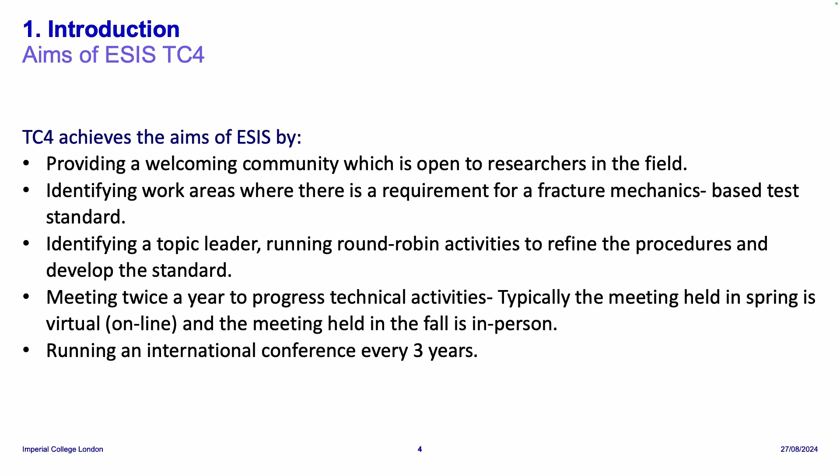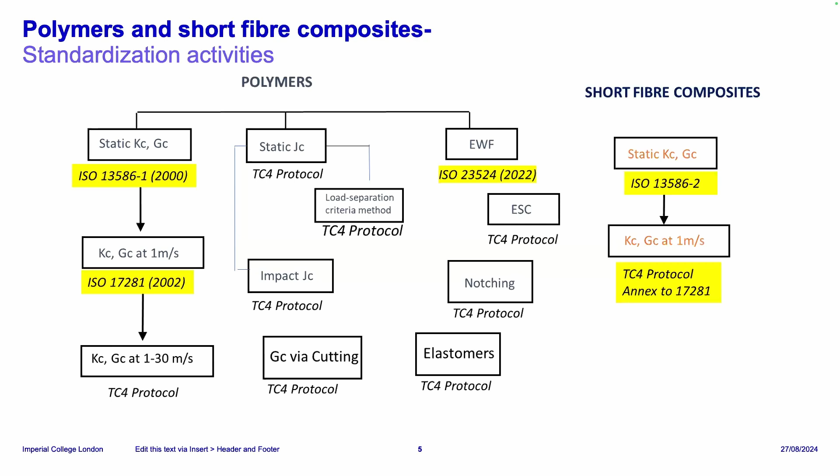Moving down, notching. So notching was something that was not terribly well defined in the early standards, and that ambiguity has sort of left certain problems within the system, which we feel needed to be resolved. So we've had an activity on notching, and quite a lot of progress has been made on that recently. Coming down to elastomers, so I'll say a little bit more about that in a moment. But certainly the extension of the left-hand side here to short fiber composites was something that was also achieved and was part of the early work.

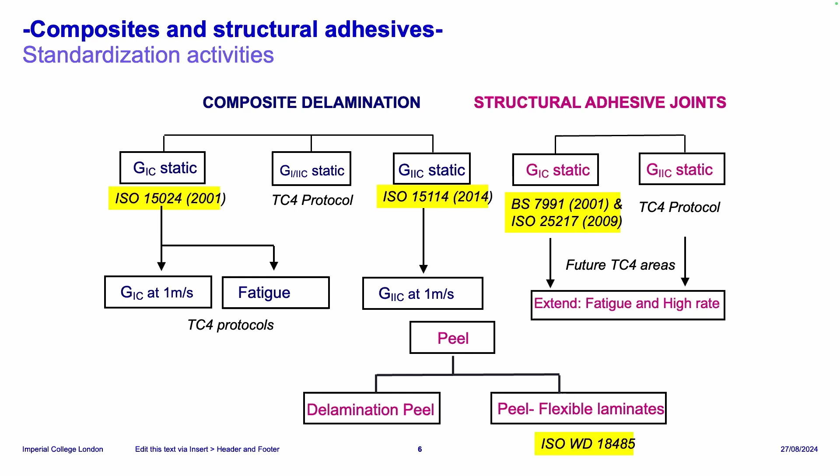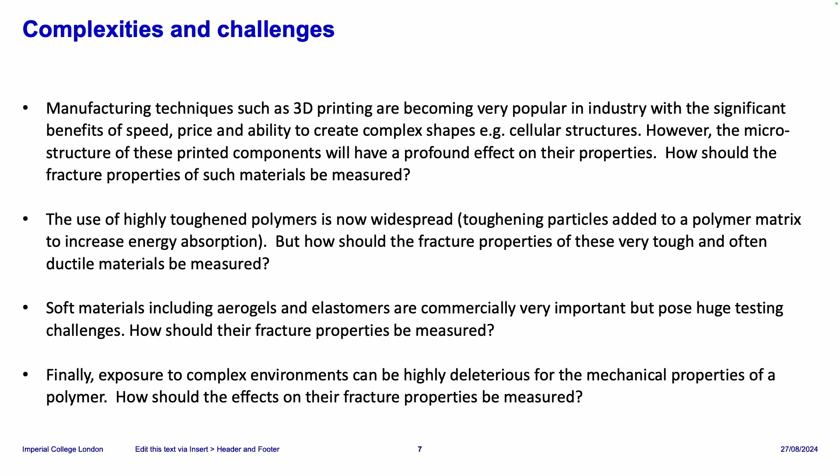And then what about very soft materials? So Alicia was talking earlier about aerogels. Now these pose us with many, many problems. So this is clearly a complex and challenging area for the committee. How should their fracture properties be measured? And for example, what about exposure to complex environments? Again, for polymers, this is a big question. So let's just have a quick look at 3 examples.

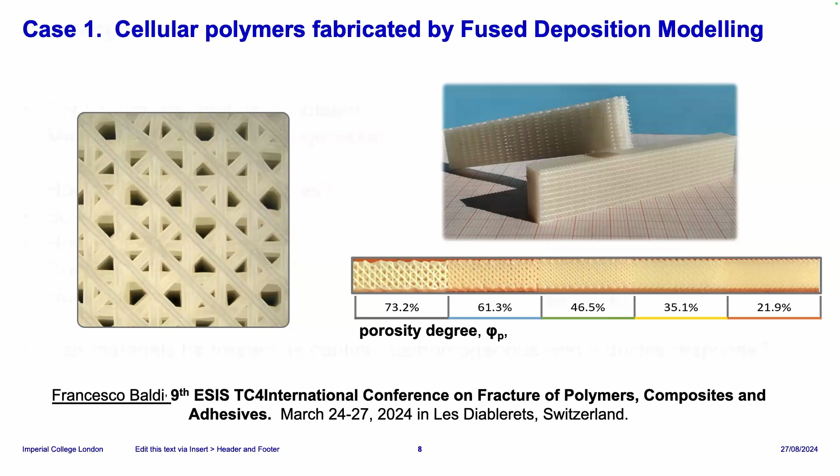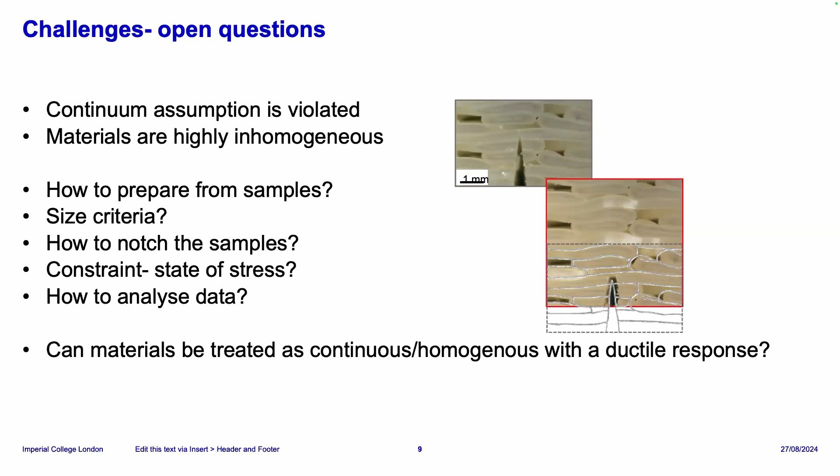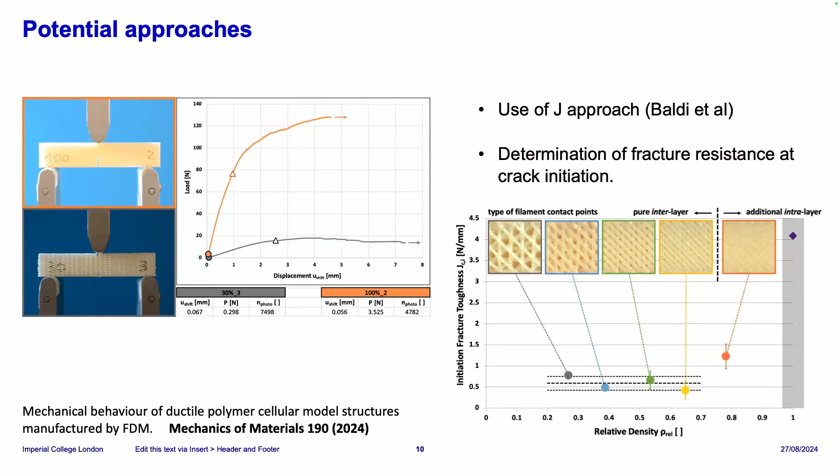So these are some slides from a recent paper by Francesco, where he's been looking at doing that, really applying known J techniques to these sort of materials and looking at the resistance to fracture initiation using the J technique for these sort of materials as a function of the relative density of the material. But clearly many challenges are faced here and lots of work to be done.

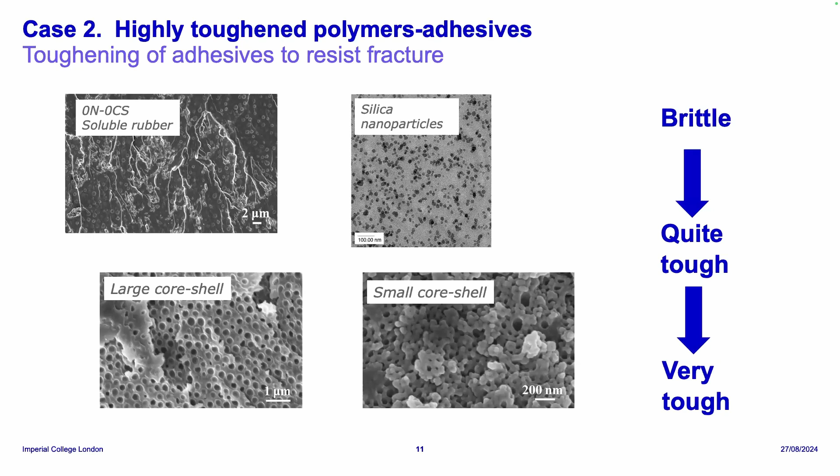Moving to the second example, and apologies for those of you who were here before the break, you would have seen this slide, but one of the areas that I've been leading is structural adhesives, and one of the challenges we're facing there is the materials becoming very tough and very ductile and being increasingly difficult to analyze and test within the constraints of LEFM. Obviously, we're using different methods to increase that toughness through, for example, soluble rubber or nanoparticles or different toughening particles with different properties like core shell rubbers.

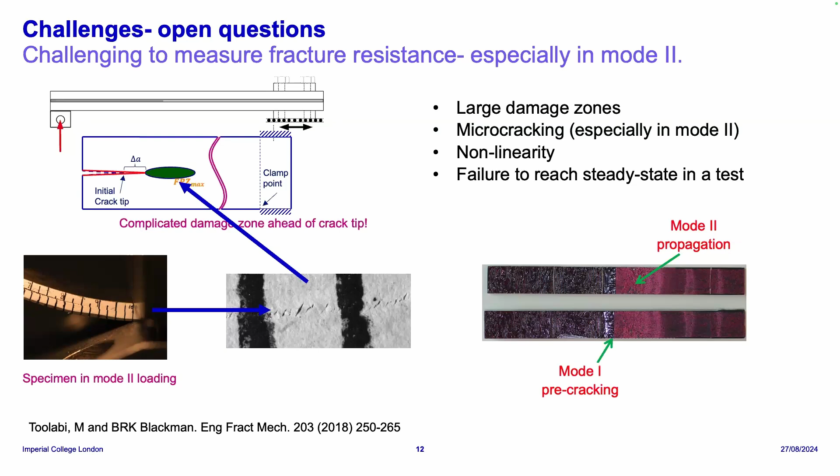And traditionally, this has led, in particular when we use mode 2 loading, to very large damage zones. So large fracture process zones being present with situations like micro cracking occurring. So we have particular issues also with nonlinearity and potentially the failure to reach a steady state in that sort of experiment.

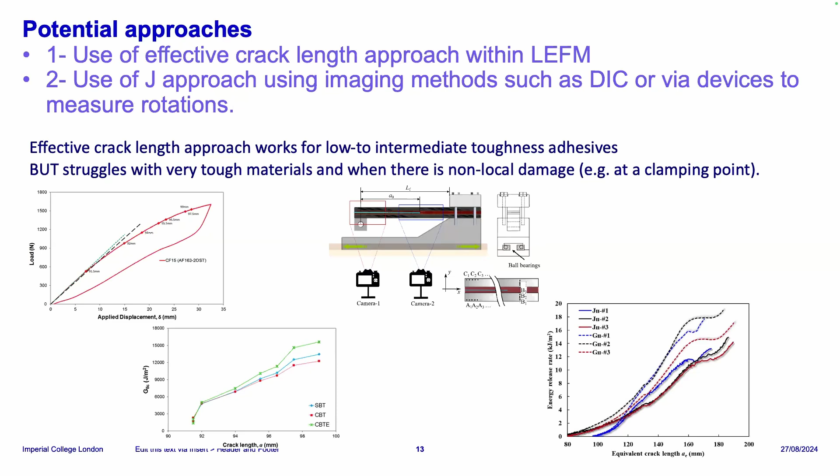What are the sort of potential approaches here? Well, of course, we've done quite a lot of work using effective crack lengths within the LEFM regime, and also the J approach combined with imaging methods such as DIC, and potentially the use of devices such as inclinometers to measure rotations. We've been making some progress in that, but of course there's an ongoing activity looking at this.

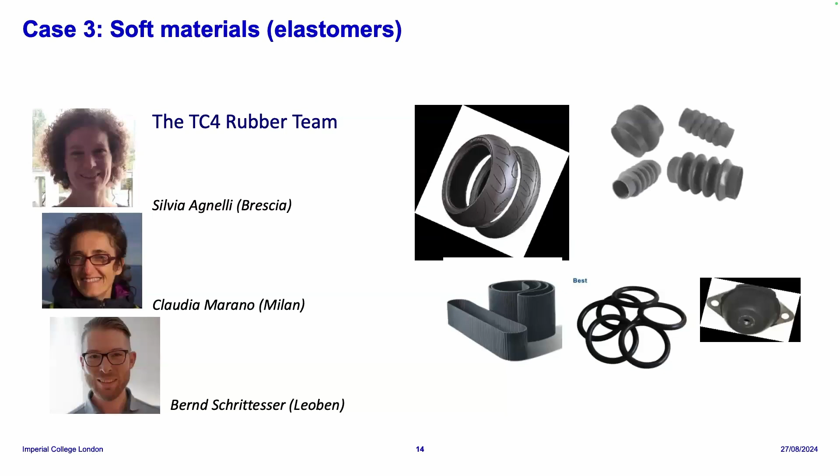Moving to the third example that I just want to briefly touch upon, and this is the area of soft materials. So a little bit similar to the aerogel work that Alicia was talking about. Obviously, if you've got rubbers, then these pose us with additional challenges. So I just introduce here the TC4 rubber team as they named themselves. We didn't name them the rubber team. So Silvia, Claudia, and Bernd there head up the TC4 rubber activities. And there's a round robin taking place at the moment, so there's opportunities to get involved with that.

So challenges and open questions here are manifold. Rubbers, which are filled elastomers, are highly complex materials. They are non-linear elastic, and they can have dissipation within their mechanical behavior. We can have interaction between the filler and the polymer chains, which can be reversibly lost. So quite a complicated situation. Obviously, they can harden due to chain orientation. They can show hysteresis with reversible bond breaking leading to heating.

So LEFM is not applicable, and that's not the end of it. The little schematic on the right shows many of the deleterious things that can happen to rubber molecules. And all of these are, of course, of interest in terms of their effect on the mechanical properties. So what's happening within TC4 is obviously we're interested in the fracture resistance here. So what sort of specimens? Pure shear specimen is being employed. Single edge notch tension is also being investigated.

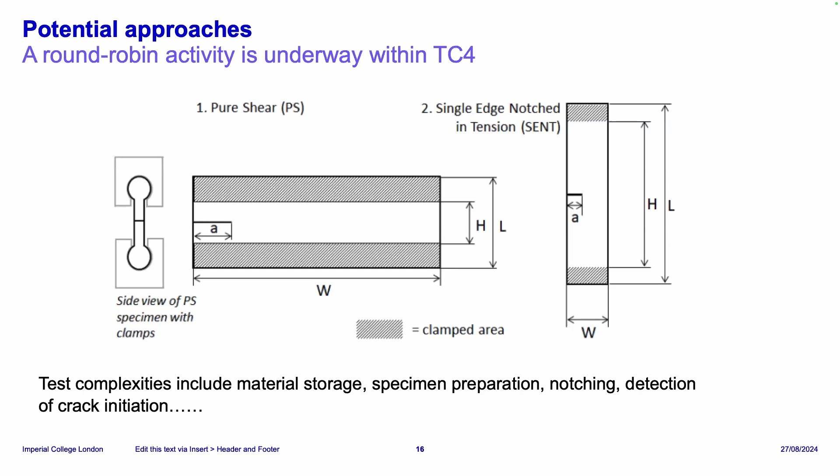So this is a big activity. There are quite a lot of participants in this round robin, and I'm sure Silvia would welcome additional people because there'll be follow-on activities, new round robins in this area. I was involved in this round robin also, and I was amazed how important, for example, the material storage was, and the specimen preparation and the notching and the detection of crack initiation. So multiple problems here have to be ironed out in the way that John Allen was talking about. We really have to nail down these techniques if the data that's going to come out is going to be at all relevant and useful.

Okay, so to conclude, the task of applying fracture mechanics to new and complex materials is challenging, and I think you probably knew that already. TC4, through its various working groups, is, we think, addressing these challenges, developing validated standardized approaches. And obviously what we're interested in doing is developing ISO standards. I think one of the earlier slides demonstrated that we've had quite a bit of success in doing this so far. We do expect modeling to become more important to our activities in future. We have run one modeling round robin, which I haven't had time to talk about, but there's more of that to come, no doubt.